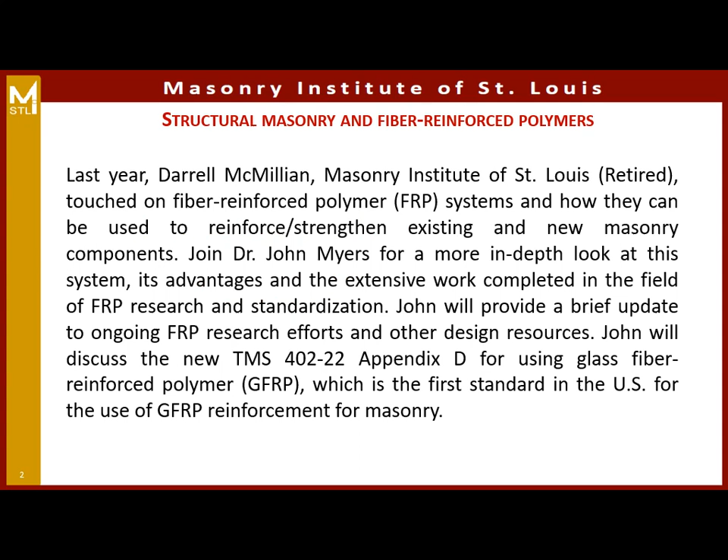Structural masonry and fiber reinforced polymers. Here is the program description and our learning objectives. You will also receive 1 PDH and 1 AIA LU for those architects.

Today's speaker, Dr. John J. Myers, is a professor of structural engineering in the Department of Civil, Architectural, and Environmental Engineering at Missouri University of Science and Technology, and is director of the Missouri Center for Transportation Innovation. He served as Associate Dean for Academic Affairs in the College of Engineering and Computing from 2015 to 2020. Dr. Myers has been a member of the Missouri S&T faculty since spring of 1999.

He holds a bachelor's degree in architectural engineering from Pennsylvania State University. He previously served as a college acting vice provost and dean. Dr. Myers has researched high-performance materials for the past 30 years in relationship to structural engineering applications. Relative to today's presentation, Dr. Myers is current secretary for ACI Committee 440 on fiber reinforced polymers and assists in an advisory role to the TMS Appendix D task group and a consulting member of PCI's FRP Composites Committee.

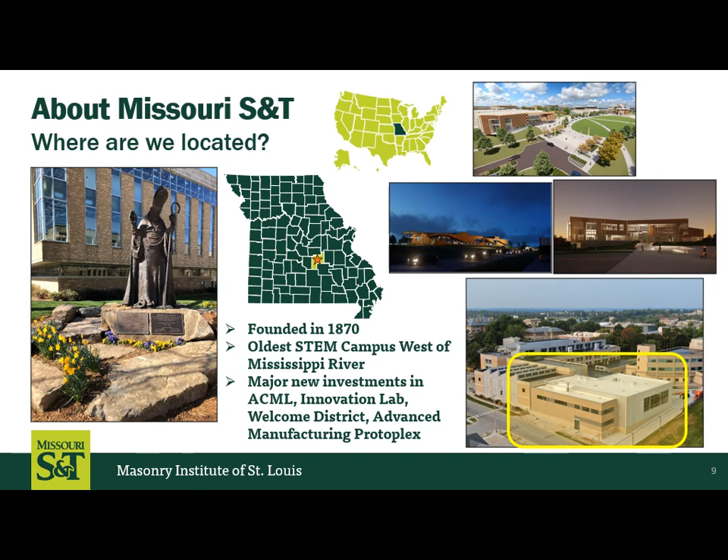And one of our biggest additions, thanks to support from Clayco up here in St. Louis, has been the Advanced Construction Materials Laboratory. It's really the top facility in the country now, and that added on to our structural engineering lab here. We really have outstanding facilities and capabilities. Even though we don't have Division I sports, we've got a great academic program. We actually have 17 different undergraduate degrees in our college of engineering, and essentially, that's the most of any university in the United States. Also, most of our students are in engineering.

So usually it's about 80% of our students in engineering, and specifically that makes us usually a top 20 producer of engineers here in the United States. So if you do have family members, relatives, friends that are thinking about it, come check us out. It's worth the hour-and-a-half drive to take a look at what we've got.

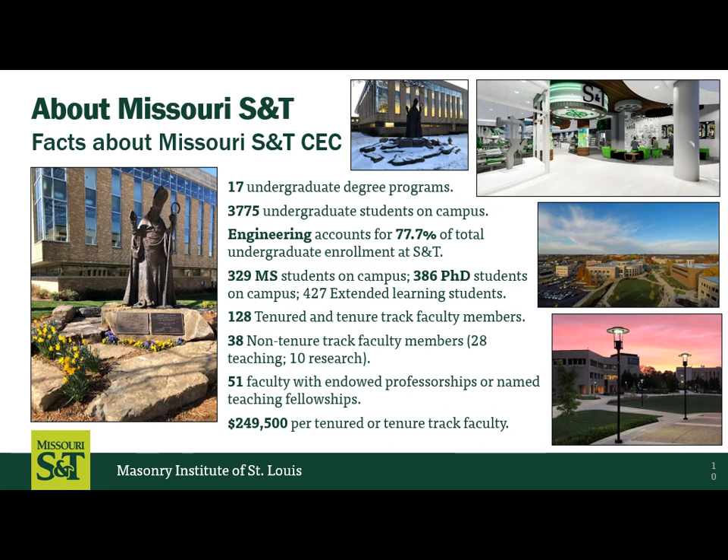One of my roles, I've done a lot of different things over the 25 years I've been at Missouri S&T, but I'm currently the director for our statewide transportation center, and it's actually the University of Missouri System Center. So we work with faculty not only in Rolla, but also at Columbia, at Mizzou, UMKC, and also up here at UMSL. And it's really neat.

One of the big things you've probably heard of is the widening of Interstate 70 all the way from St. Louis to Kansas City, and that's going to give us a lot of opportunity to hopefully have a lot of innovation in the bridge replacements and some of the pavement systems that go along there. A little outside of masonry, granted, but wanted you all to be aware of that.

Today's learning objectives, I'm not going to read them. Margie mentioned some of those, but they're also in your packet for you to study. Basically, we're going to learn more about GFRP and also the new Appendix D, and then I also wanted to pick a couple of research topics. So my presentation is separated into part 1 and part 2 that we'll cover.

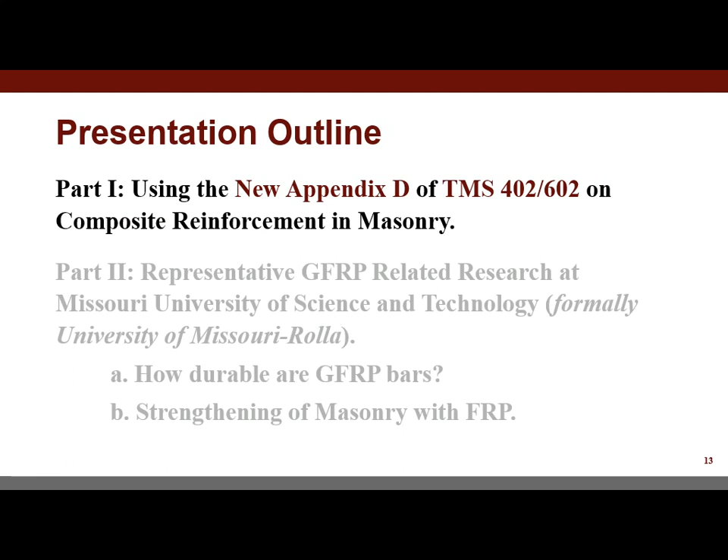Part 1 is going to talk about the new Appendix D and TMS 402-602. And I want to acknowledge Heather at Colby Company. She's very involved in the task group working on this Appendix D, and she did give me some of the content for this part of my presentation. So up front, I really want to thank Heather for giving me some of the material in this section of my presentation.

GFRP bars date back more than 25 years ago. When I started at Rolla in the late 90s, research was already taking off on how we can use these non-metallic materials in structural engineering applications. And in the early 2000s, actually as early as about 2001, at Missouri S&T, Tony Nanni and some of us at the university did some of the first research on masonry using both FRP for repair as well as for grouted cells as reinforced masonry with GFRP.

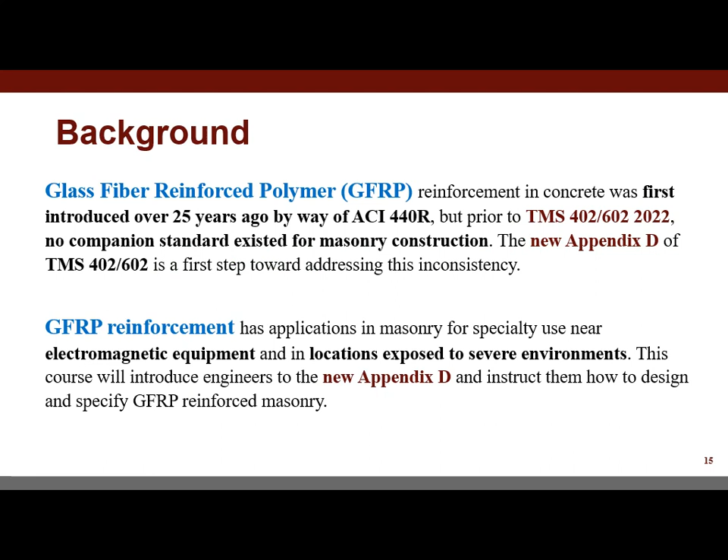So even though it's been like 20 years, now we finally got a section in the TMS standard. Where do you want to use GFRP? A lot of times if you have issues with electromagnetic equipment, MRI equipment in health facilities buildings, it's a good application, as well as in areas where you're worried about corrosion of steel in severe environments. Other applications, GFRP has a very low mass, so when you're doing seismic retrofits or repairs, it's a very high strength material with low weight, low mass—also very good for seismic type repairs.

I'm going to go through, before we jump into the Appendix D, and talk a little bit about ACI, ASTM, AASHTO, and the Masonry Society documents.

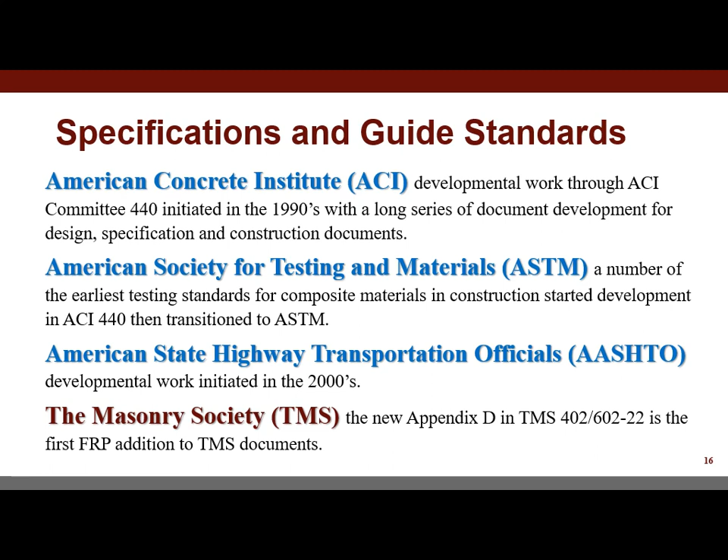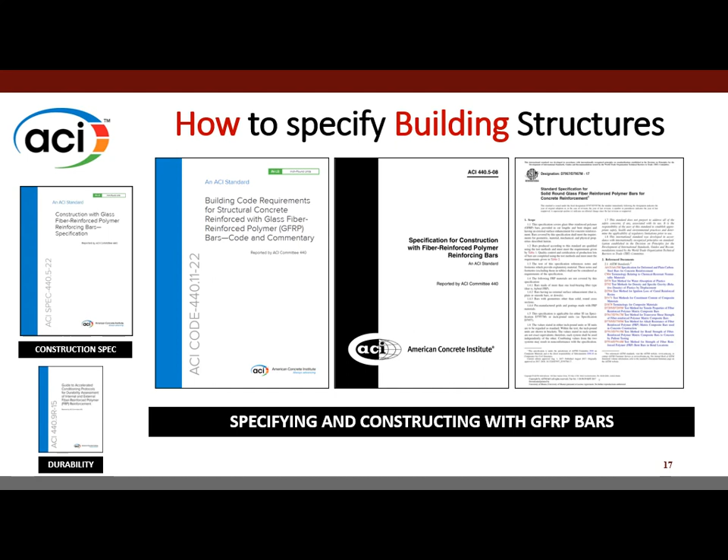And so I always like to say, you know, you need the 3 legs of the stool. If you don't have the 3 legs of the stool, what can happen? It can topple over. But it's the material spec, the design code, and the construction spec. So even though some of these aren't necessarily falling underneath TMS, these documents are out there at ASTM, ACI, and so forth to help us as designers.

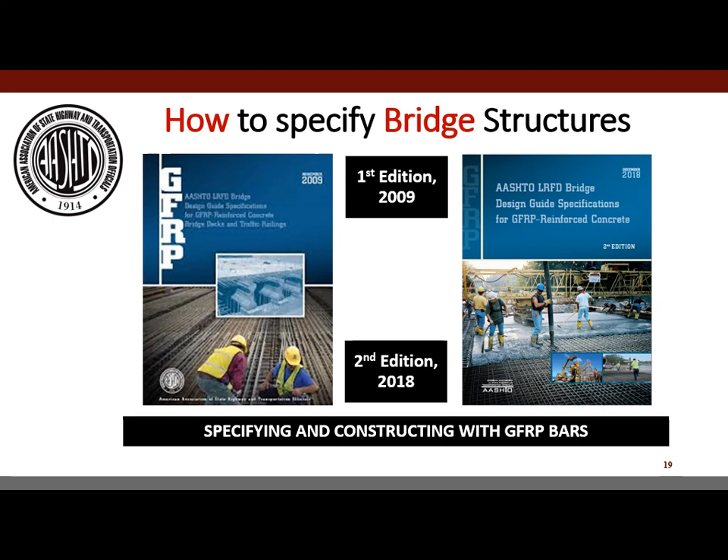Following the development from the late 90s up until today at ACI, on the bridge side, some of the first applications was 2009. Now what you see in the images here are more use in bridge decks. We're going to talk about why some components are better use of FRP than long-spanning elements where deflection or serviceability is an issue. But you can see here 2018, and it's really a good place to use GFRP in decks, for example, because they're not necessarily a collector element of loads.

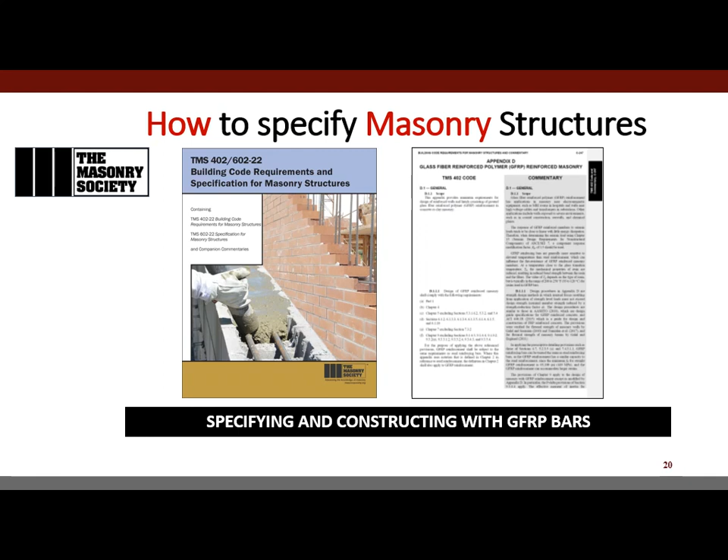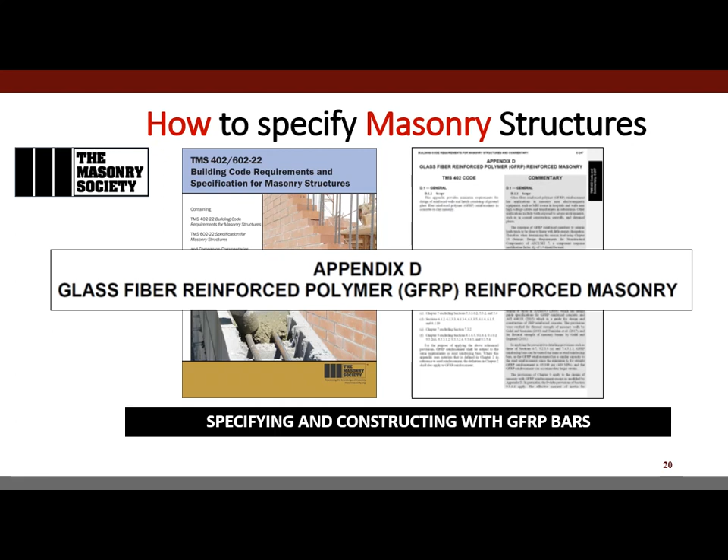So now that brings us to TMS and masonry. Again, we're going to be talking about Appendix D in the new standard that's out there. We'll look at one example in today's presentation, but your packet also has a second example in the back of it for you to take with you that we just don't have time to get into today.

All right, GFRP. I think I brought a sample with me. I'll pass this around a little bit if you've never seen it. Very lightweight material compared to steel.

Basically, if I think of concrete, concrete is made up of what? Coarse aggregate, right? Fine aggregate, Portland cement are the basic building blocks, and potable water, right? In concrete, we get the stiffness from what? The aggregates, right? And the paste, the Portland cement and the sand or the fine aggregate, is the glue that holds the aggregate together. A composite material like this is very much the same. It's got the fibers in it that carry the load, provide the stiffness, in this case glass, and then there's an adhesive, in this case we call it a resin, that is the glue that can transfer the load between the fibers. So if I use the analogy of concrete, these composites are just the same.

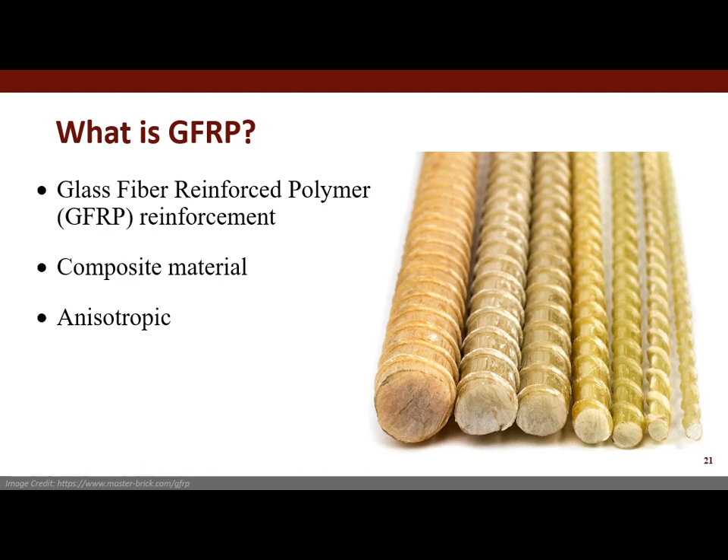One difference here is anisotropic. Okay, sounds like a fancy word. It just means that the properties of the material are not the same in all the directions. So if the fiber is running vertically, that's going to have one stiffness and one tensile strength, for example, in that direction. But if I cut it perpendicular to the direction of the fibers, it's going to have much different properties. So if I take a mild steel bar, right, we call that what kind of material? Homogeneous. So if I cut in this axis, this axis, this axis, mild steel is going to have the same stiffness and the same properties, right? So one thing we need to learn about the use of GFRP is it has different properties in different directions.

Okay, when it's manufactured, this schematic shows how it's manufactured. Again, up here you can sort of see a schematic of the actual fiber and the resin. There's different types of resins. There's polyester resin, that's an older generation. Now there's vinyl ester, which is a better product, a better glue or adhesive that's more durable.

When it comes to producing it, again, you have the spools of the continuous fiber. You get to a stage where you do some surface treatment. In this image here, you can see A through F. There's different types of treatments I can put on this. Some are just a sand coating. You can see some have some helically type of windings on it. But if you were to guess, why do we care about the surface treatments to the bar or the product? That gives us better bond, whether it's concrete or whether it's grout in a masonry cell. So it is important in terms of the surface treatment to the reinforcing material.

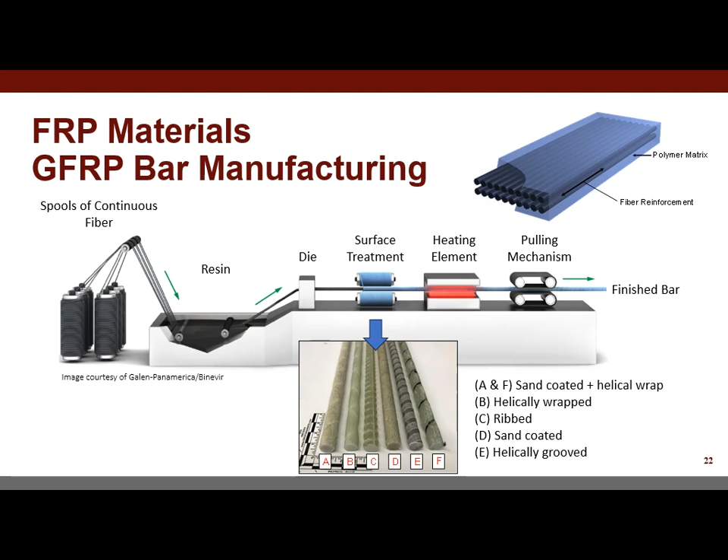We know it's non-corrosive, it's thermally neutral, non-conductive, it's lightweight, like I said earlier. And of course, if I'm at a job site, it's a lot easier to move around because it's a much lighter weight material.

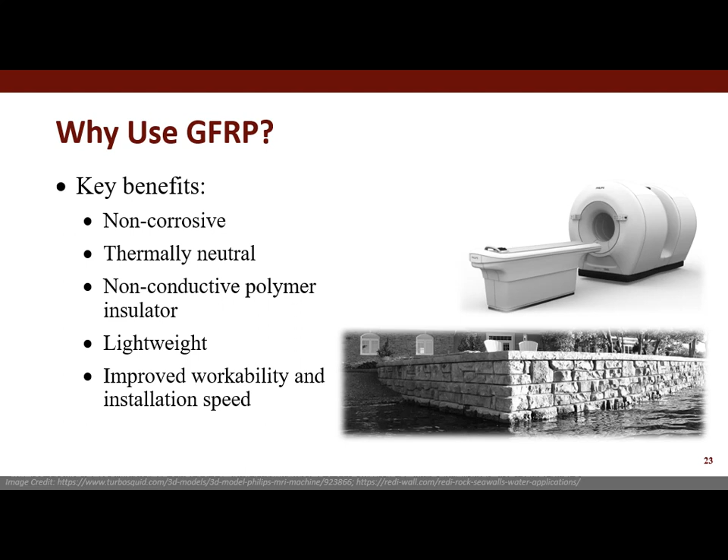So when we talk about Appendix D and its scope, first I'm going to talk about right now what it is included in the document, and then we'll look at what's not included. The path in terms of what's in the TMS document and design standard is very similar to ACI. As we went along over the last 20 years, each time we developed a new version of it, we added newer content to it to help us as design engineers. Right now, this is an Appendix D, but I see down the road that this will be integrated into the main section of the standard. But again, G standing for GFRP. There's different types of FRP.

There's carbon, there's basalt, there's other bars out there. This document right now just looks at the use of glass. I'm going to talk about why glass is a really good material for masonry, because it's very compatible to be used in masonry rather than carbon.

If you hear the word carbon, what pops into your mind? A company a little north of us, Boeing, right? There's a lot of carbon fiber in the aviation industry. It's much more expensive, and it's got much higher tensile capacity, as high as 300 KSI, compared to maybe 100 or 90 KSI in terms of the tensile capacity of GFRP.

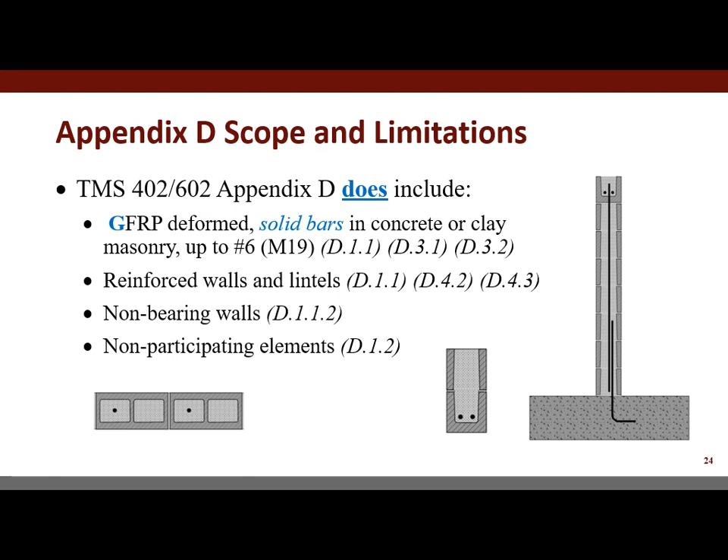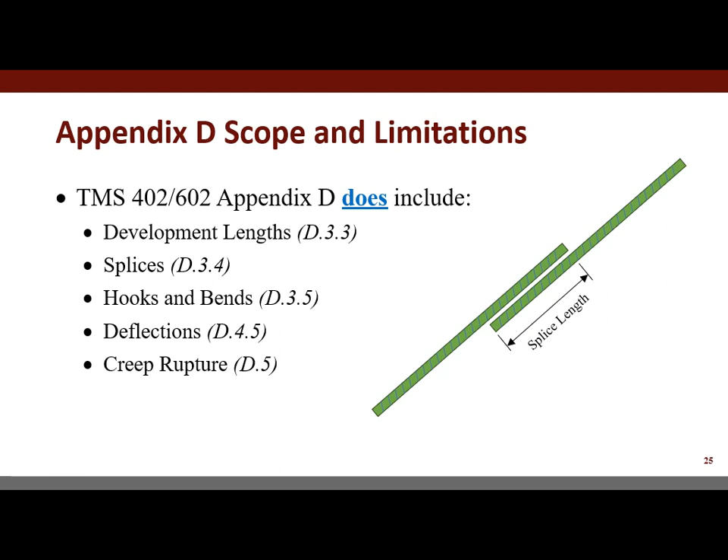It also includes guidelines on how to determine the development length, so how far we need to anchor this in order to develop the tensile capacity of the reinforcing material. I showed an image I put together on splices, hooks and bends, deflections, and creep rupture that we'll talk about. All these are covered in the Appendix D section.

Right now, because this is a linear elastic material, not as much has been developed on seismic requirements. I'll go back to when I was working on my PhD at Texas in the early to late 1990s. We were working on high-strength concrete. Everybody was concerned that high-strength concrete, under compression, is very explosive when it fails - not a very ductile material. All very true, but over time we learned more about how to reinforce it to use higher strength concrete and still give us ductile behavior.

And now we have a thing called UHPC, a very ductile type of material. So even though right now there aren't a lot of seismic guidelines on using these materials because they are linear elastic and don't necessarily have a yield plateau like mild steel reinforcement, people are diligently working on this, and I suspect down the road for seismic applications we will develop good connections in order to do an entire masonry structure out of FRP, even in a seismic area.

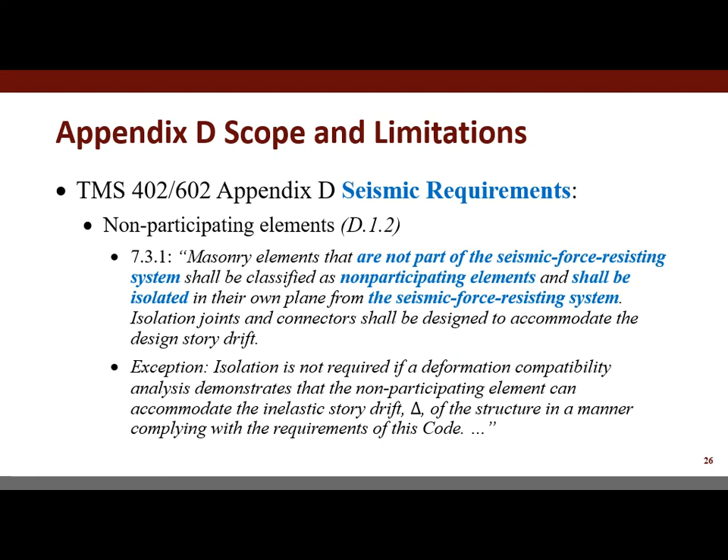But there are some guidelines on that. Now, what does TMS 402 and 602 not include in terms of the appendix? Right now, bearing walls, shear walls, columns, and so forth. Again, it's not that the knowledge isn't out there - it's just incrementally taking the steps in terms of building up the document to address these.

The other thing not covered is externally bonded systems. Cosmetically, maybe this isn't the most attractive thing to do to a masonry wall - we all agree with that, especially our architects in the house here. But there are techniques to strengthen masonry walls, called near surface mounting, where you slot the bed joint and put it in there either with cementitious material or epoxy to get additional strength. A lot of times this might be used on unreinforced masonry walls, or you can use laminates or sheets that we call here.

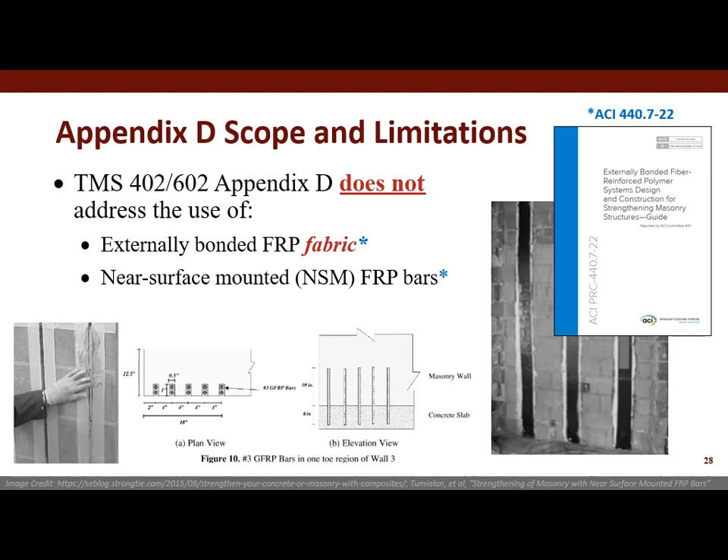Now, this currently is not in TMS documents, but we developed - and I'm on this subcommittee at ACI as well - ACI 440.7, which covers if you want to repair masonry for whatever reason. Maybe it's a new classification, maybe it's an upgrade in loading needs. You can go to this document and it tells us how to do that for repair.

There's a property called the glass transition temperature. So we use this fancy term GFRP, but what is this? It's a plastic, right? We don't like to call it a plastic because some people think plastic is an inferior material, but this is a design material for our needs.

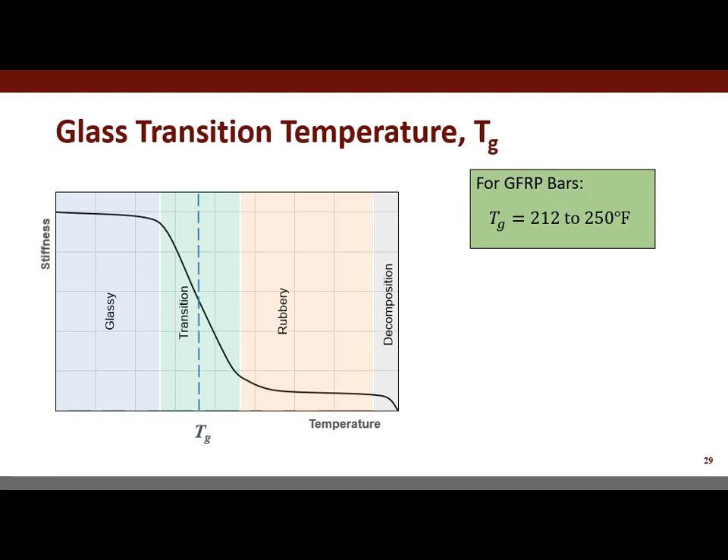But there is a property called the glass transition temperature. So if the temperature gets excessively high, that resin or adhesive or glue can soften, and that gets above this transition region. The glass transition temperature is dependent on the bar, the materials that go into the bar, but usually it's between 212 to 250 degrees. There's a new fiber, basalt fiber, that does a little bit better with higher temperatures.

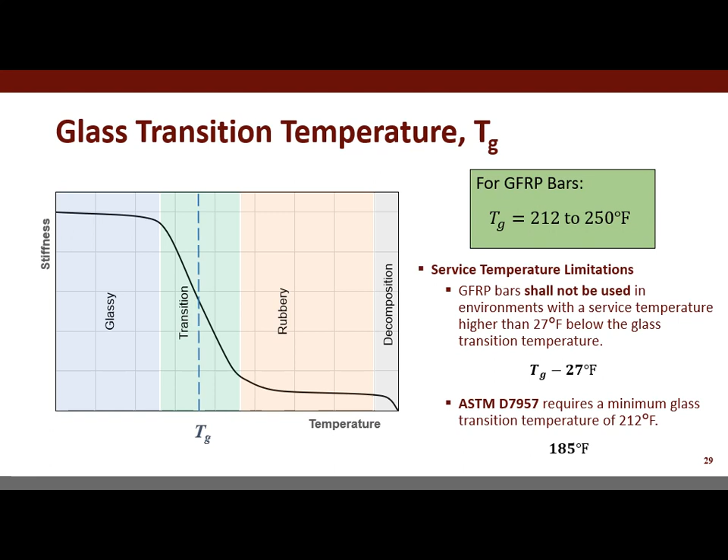If you go to the ASTM, at this minimum glass transition temperature, that's basically a service temperature of 185. Now someone may say, well, what if there's a fire and this is in a building? Well, there are ways to improve the fire rating of components using FRP.

If I look on the right, I see mild steel. From a bond perspective, what do we get out of mild steel? We get friction, which helps with the bond, and the other is mechanical bearing from the actual lugs. One difference in developing the bond or splicing the bar is that the coating system we use is a little bit different, so the development length or splice length of these products is usually a little longer than mild steel, because here you get the frictional restraint as well as the mechanical bearing. You remember your reinforced concrete classes, right?

But there are different types of coatings that are done. In fact, there's a bar manufactured in Australia where they laser etch it, actually lasering the cross section so they get a little more bearing, but they waste material by reducing the cross-sectional area when they laser etch or groove it a little bit.

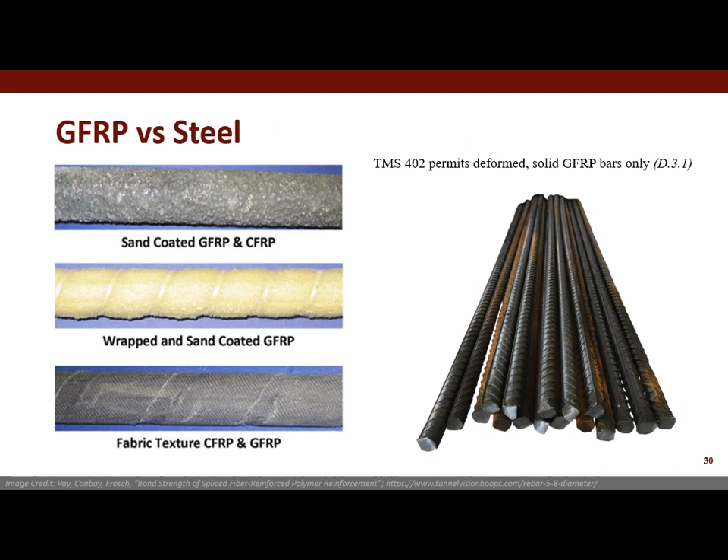When this material is used, whether concrete or masonry, the two failure modes are either crushing of the masonry unit or rupture of the bar. If I was using mild steel, my two failure modes would be crushing of the masonry or steel yielding. And in the middle of those two is the balance condition, where the masonry can crush and the bar can rupture simultaneously. The reason we're interested in the failure mode is because it affects what resistance factors or safety factors we use in design.

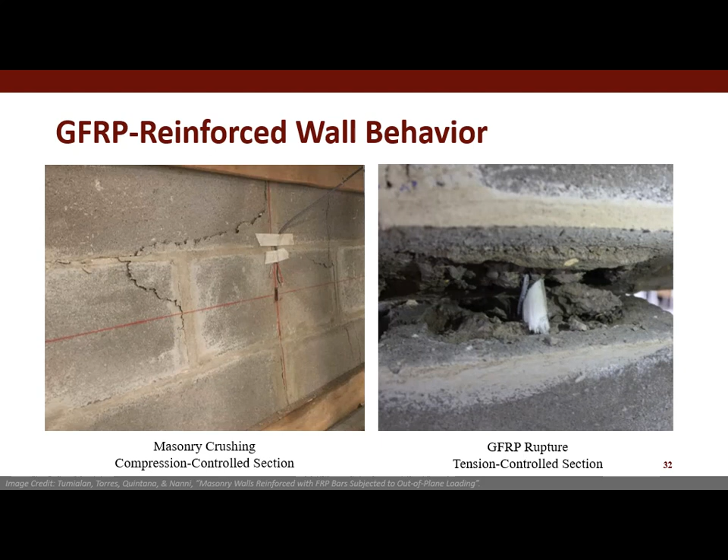In this case, when I look at these two failure modes, which one would you want to avoid? Rupture. So we have to think a little differently when we design with FRP, because we actually prefer masonry crushing as opposed to rupture of the bar. That sounds counterintuitive, but it's actually better because there's less risk of an actual structural failure in the system. However, the factors we use in design really protect us from ultimately a rupture failure.

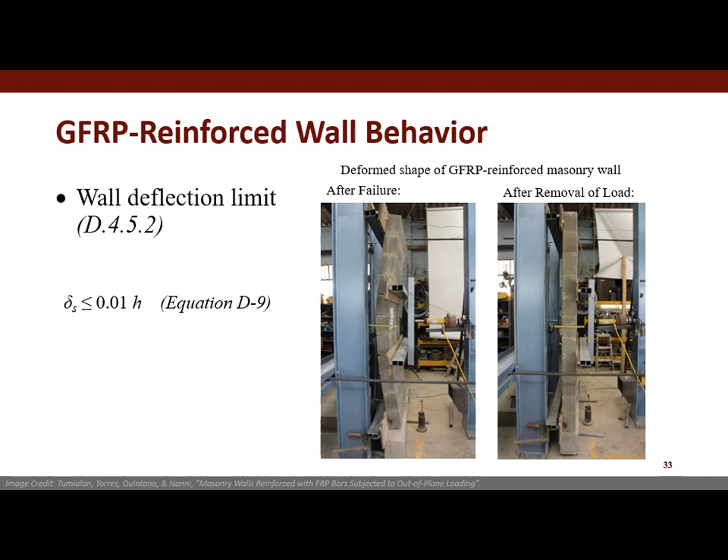Here's two examples. On the left, you can see the wall under load, and you can see these materials can really displace quite a bit. This is above the cracking moment, so you do have some damage in it. But once you let go of the load, because it's a linear elastic material, you'll have some deterioration or cracking in the wall or beam system, whatever you're designing, but it will kind of rebound like a rubber band back into its undeformed shape with some displacement-related damage.

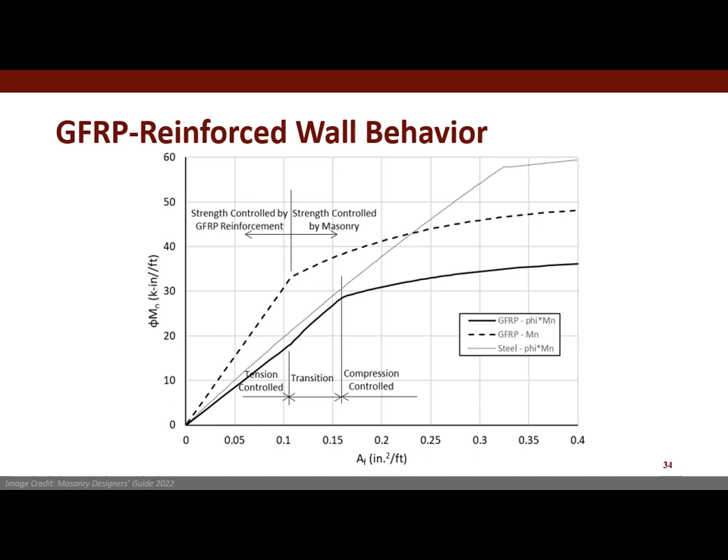Here you can see steel in the very fine dashed line, and you can see GFRP. There's no problem capacity-wise trying to generate higher levels of load. However, since the failure modes are different—rupture of the bar—we have different resistance factors in this document. If I have tension control where the FRP ruptures, the phi factor is 0.55, and you can see what the resistance factor plot looks like here. On the bottom, if it's compression controlled, it's 0.75.

Now, if I want to get more efficient use of my material, as a designer, which type of failure mode would I want in general? In this case, I'd like to use compression control because it's 0.75.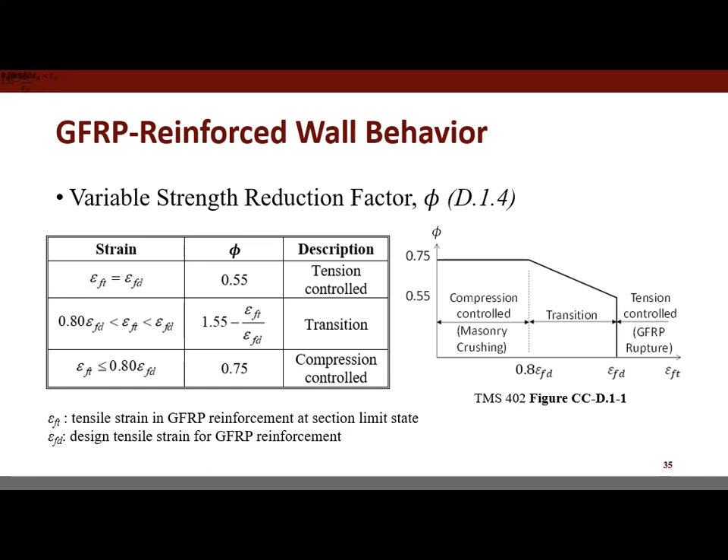If we flip this around and have a masonry system with steel in it, this value is going to be 0.9 for tension controlled and 0.75 for compression controlled. So if I have a plot here, it's going to go across at 0.75, transition, and be 0.9 up here if it's steel. I'm just trying to contrast the difference between using FRP and steel. But from an efficiency standpoint, I'd rather apply 0.75 to my moment calculation rather than 0.55. So we actually are trying to push designers to have compression controlled rather than actual loss of tensile reinforcement, if that makes sense.

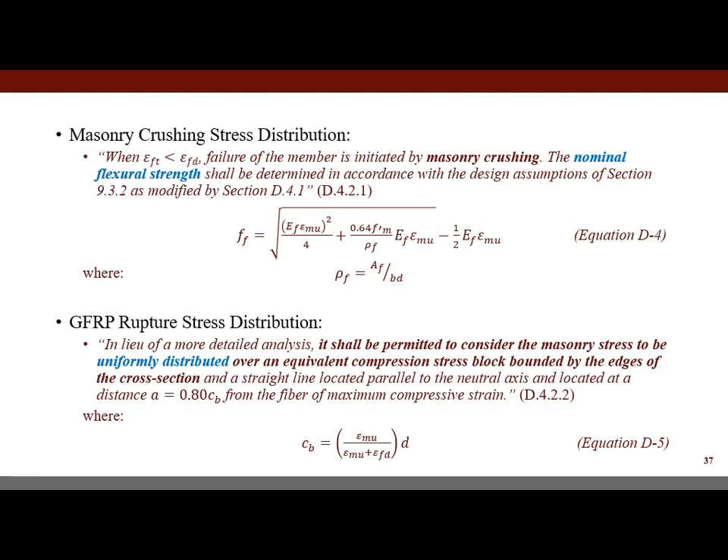There's also an estimate of where the neutral axis is under the balance condition, which is this expression that helps us estimate where the neutral axis is located when we have GFRP rupture, or tension controlled. So there are two different values for the stress in the bar at rupture versus when we have masonry crushing. In this document, you can see the C sub B, the neutral axis, when we have rupture of the FRP. I'll point out that we estimate the stress block on the compression side by 0.8 of that C sub B value for the balance condition, and that's how we estimate it. Realize the shape of the stress block and the strain block is a little different for masonry crushing versus rupture.

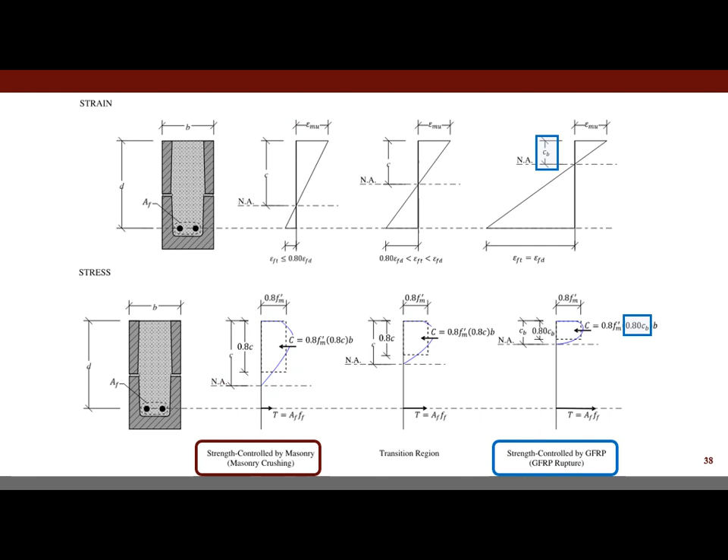When we look at the materials, another thing I want to point out is if you order a grade 60 mild steel bar, what's your guaranteed yield strength? 60 KSI, right? Ultimate's probably going to be 75 to 79, somewhere in there.

These bars all vary, since there's different manufacturers. Why do they vary? Well, that's because when I make this bar, just like batching concrete, one ready-mix plant may put more Portland cement in than the other, so the properties of the concrete are going to be different. The ratio of fiber to resin or adhesive has a requirement of 70% fiber minimum, but different manufacturers have different sizings of the fiber, so all the products are a little bit different. So when we design, we might have to make some assumptions on the properties of the bar.

There's not lots and lots of rebar manufacturers. There's Owens Corning, there's V-Rod, there's several ones. But it's important to know what the manufacturer's properties are that you're going to be using, or your best estimate that you can come back and tweak later as the designer, maybe in a spreadsheet.

The other thing is that the bar size affects it. Smaller bar diameters, because of the sizing of the fibers and the ratio of fiber content to resin, generally always have higher tensile capacity than, for example, a number 8 or number 10 bar. The larger the diameter of the bar, usually the lower the tensile capacity, because of the surface area to volume ratio and some of the logistics of the content.

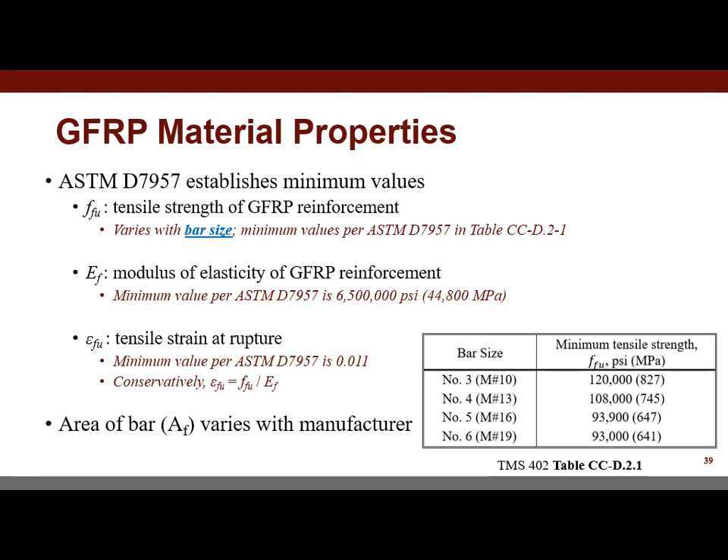But here you can see that there's ASTM, which gives some minimum requirements. So you can always design from the minimums, but of course, if you want more effective use of the material, you want to know exactly what you're working with.

One of the things we apply to GFRP is called the C sub E, or the environmental reduction factor. This is always kind of odd for people, but if I have an outdoor structure and it has steel in it, at some point, what's eventually going to happen to the steel? It gets oxygen, it gets moisture. It's going to corrode eventually, right?

Now, we never put a penalty on steel because it might corrode one day, partly because we know it has strain hardening. We get extra capacity out of it, and we have load factors and other things. Since this is a linear elastic material, we apply an environmental reduction factor, and we use 80% and 70% depending on its location. And there's 3 things that these bars are affected by.

One is temperature, right? We know a little bit about excessive temperature, but temperature can affect it. Moisture can affect mainly the resin, not the fiber so much. And the other thing that can affect it, besides moisture and temperature, is sustained stress.

The other thing is we have a bar bend factor, K sub B. So if I manufacture this bar and want to put a bend in it, the properties around the bend are a little bit different than in the straight portion. So if we have something where the bend properties are critical, we actually have a factor that takes into account the fact that when we manufacture and bend this bar, the fibers may congregate to one side of the bar.

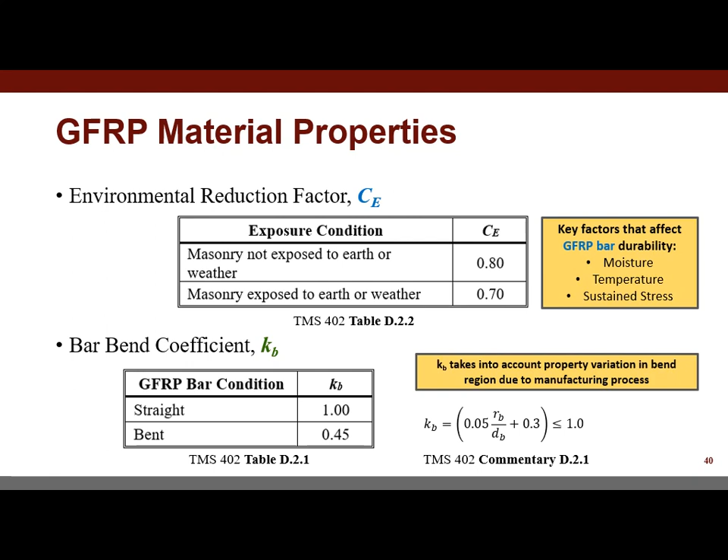Again, for environment, moisture, temperature, sustained stress, I always liken this to steel corroding. All materials eventually deteriorate at some point, whether it's slow or fast. And this takes into account the bend, as we talked about.

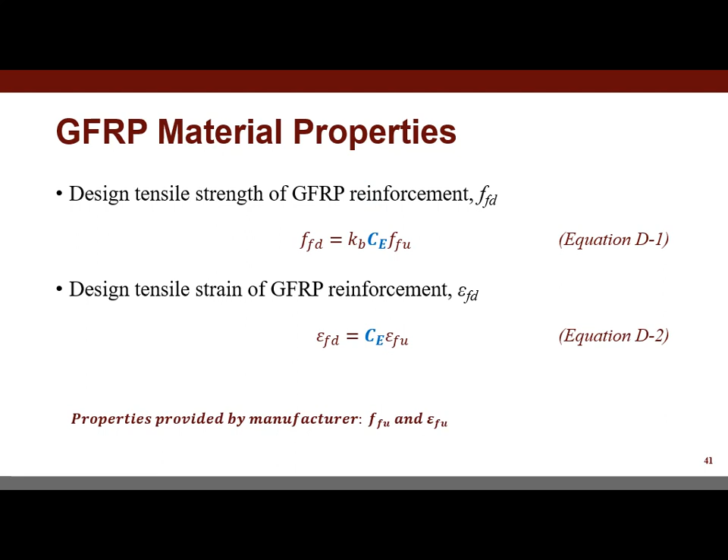So one of the things is we get the manufacturer's properties here, F sub FU. The students always laugh when I say F sub FU in class, but that's the ultimate tensile capacity of the bar. We multiply it times the exposure it's in, and then if there's a bend in the bar, we apply the bend factor, whether it's 1.0 if there's no bend. We apply that to both stress and strain. So it's kind of like a knockdown factor, think of it like another resistance factor essentially. And again, just keep that in mind, that's something we're not used to regularly doing. We have the phi factor we talked about.

We apply that to the nominal. And of course, we make sure it can carry the loads, the ultimate factored loads we're designing for.

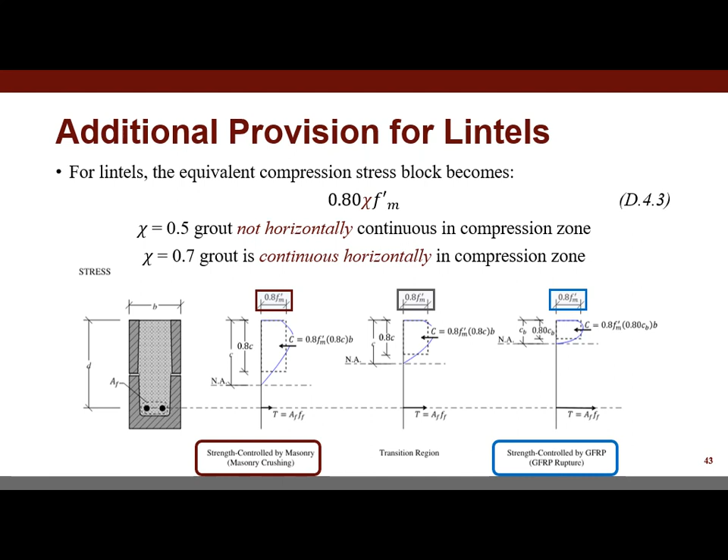Keep in mind that we have 0.8 times F prime M. And there's also a factor that comes in here, whether the grout is not horizontal or whether it's continuous horizontal, because that gives you more capacity in the element, in the section.

For shear, actually in shear right now in the TMS document, we ignore it. So if this were concrete, we would have V of C from the concrete, and we would add V of F from the stirrup or fiber that's made out of FRP. We're taking a conservative approach in this document, saying there's no contribution from the GFRP, even though really there is some contribution in terms of shear resistance. But for now, it's silent and it's ignored.

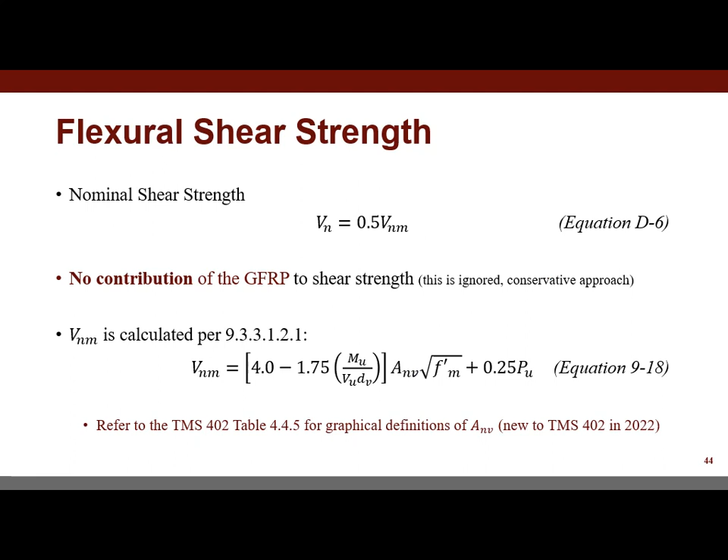But some of these other relationships are very similar to what you might see previously. Creep rupture: if I take this bar and keep a sustained load on it, over time, if that sustained load is too high, it can result in an unintended rupture of the bar. So a lot of our materials are creep sensitive in different applications, and this is one of them. Now remember, when I say sustained loads, I'm talking about effectively the live loads that are involved, wind load if it's a wall, those sorts of things.

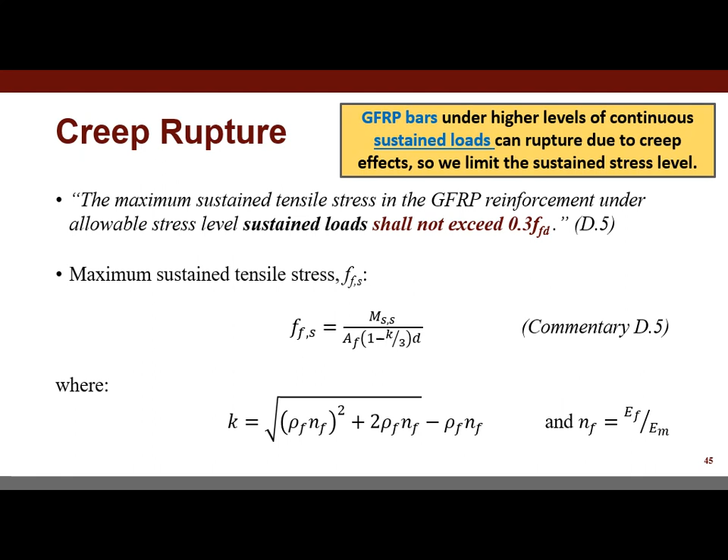But we do need to make sure that it's less than 30%, okay? So that's another consideration, and you see my note up there that higher levels can cause an unanticipated rupture of the material. So let's take a look at an example, and I better pick up the pace a little bit.

Here's an example of an 8-inch CMU wall. It's got the masonry characteristics, the maximum usable strain in masonry, and location of the reinforcement, the amount of the reinforcement. These values for AF, EF, and the tensile capacity all come from the manufacturer, or those ASTM minimums.

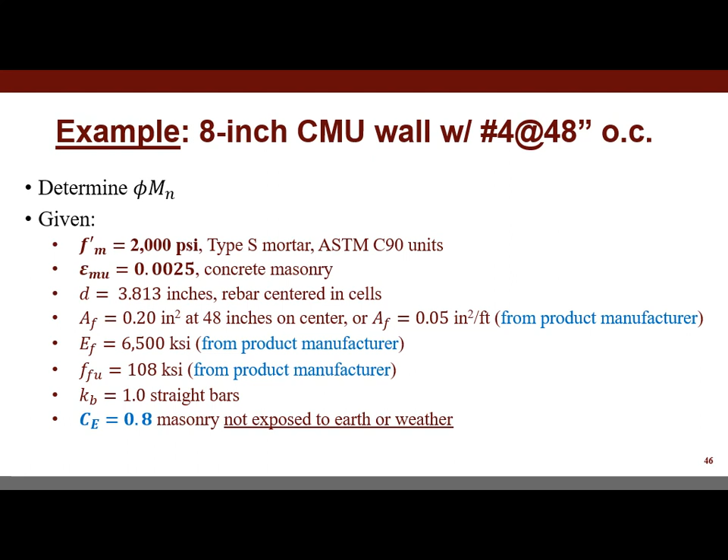And if this is not exposed to earth, we're going to use a 0.8. There's no bend, so it's 1.0. So the first step is we calculate our design value here. Again, we saw that equation earlier, 86.4 KSI.

We can relate stress and strain. It's linear elastic, Hooke's law, you guys remember that. And we can calculate the strain value from Hooke's law. Then I can determine what the reinforcement ratio is.

If this was steel, it would just be AS over BD. Here we have AF representing the area of the fiber. And the importance of calculating the reinforcement ratio that you're using in your design versus the reinforcement ratio of the balance condition is it tells us where that tipping point is between tension controlled and compression controlled of the masonry.

So if I know what the balance condition is, right in the middle between those two failure modes, if I'm less than that, I know the bar is going to rupture. If I'm higher than that, then the masonry is going to crush. And so it's important that we calculate our reinforcement ratio and our balance condition.

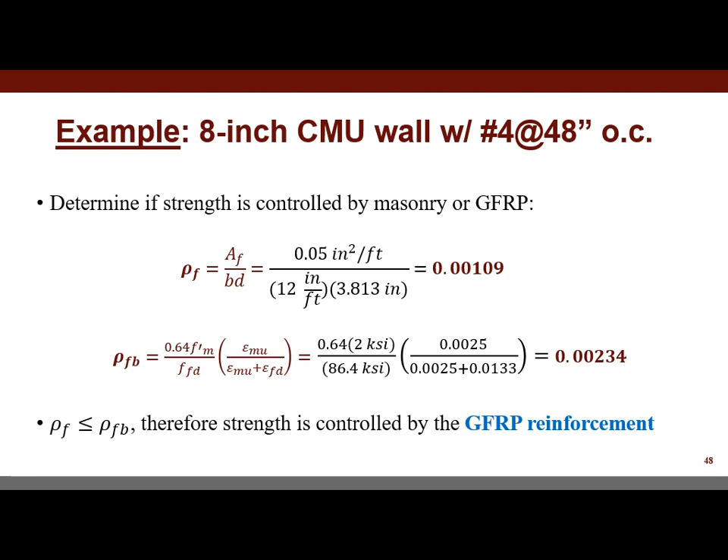And then we can calculate where the neutral axis is. And then once we have that, we have everything we need to calculate our nominal moment capacity of the wall, which we do here. Again, whether it's concrete, whether it's masonry with steel, we're basically pretty familiar with this expression other than the 0.8 C sub B.

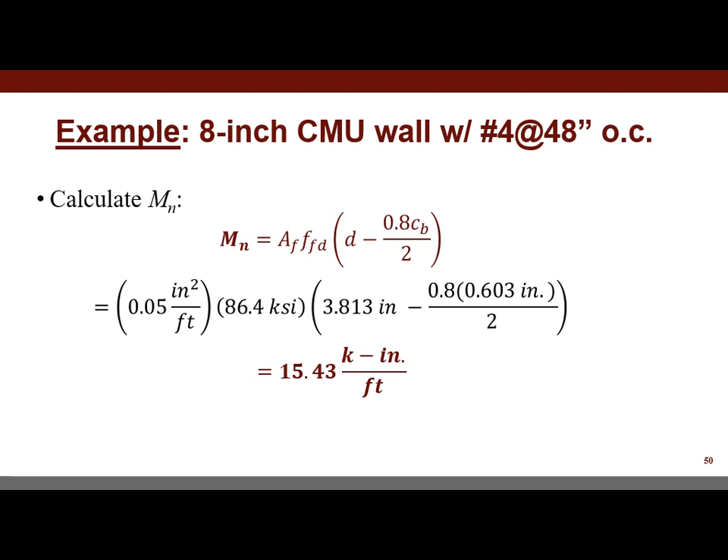And I would ask questions, but I know we don't have time right now. So just remember, 0.55 is the resistance factor because we're tension controlled.

This case is designed for FRP rupture. Although remember what I said earlier, we'd probably actually prefer compression control because this value here would be larger, and our element would carry more load that way, right?

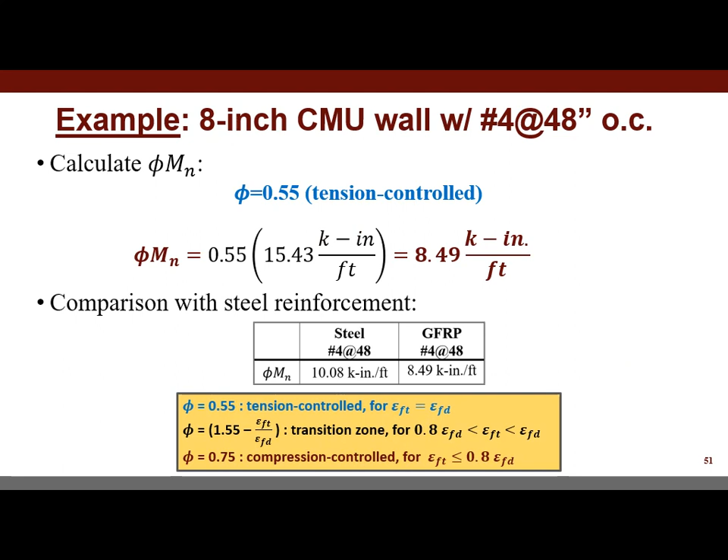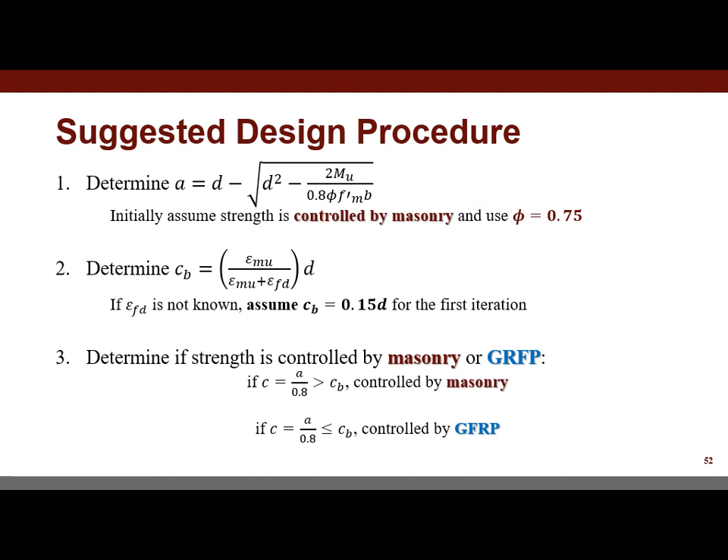This is the suggested steps in the design procedure. I won't go into detail, but this is basically what we just walked through. Step 3, we were looking to see what type of failure mode it is, and whether it was controlled by the masonry or the GFRP, and so forth.

This is going to transition me to the second part, and I'm going to pick up the pace a little bit because I don't want you guys all walking out on me, getting back to work. But I wanted to pick a couple of quick topics on the research side.

So I picked, how durable are GFRP bars? Your question may be, oh, I see the C sub E factor. This worries me, it's going to deteriorate and fall apart. Well, probably not. The Boeing planes with carbon in them, they don't fall out of the sky regularly, right?

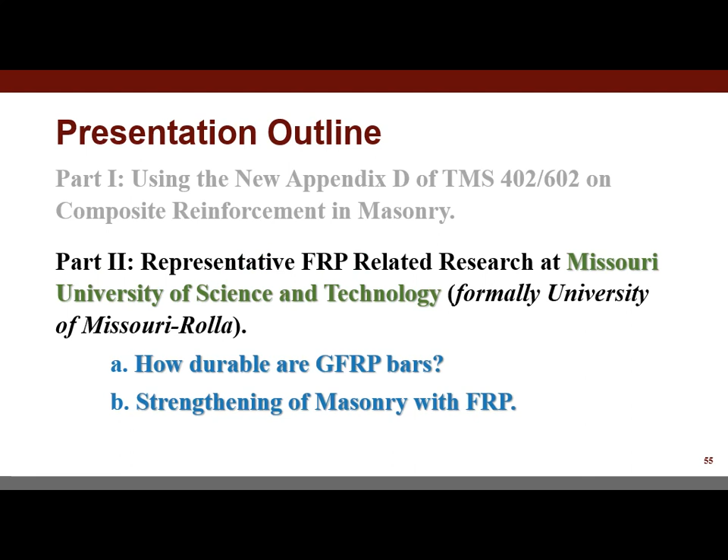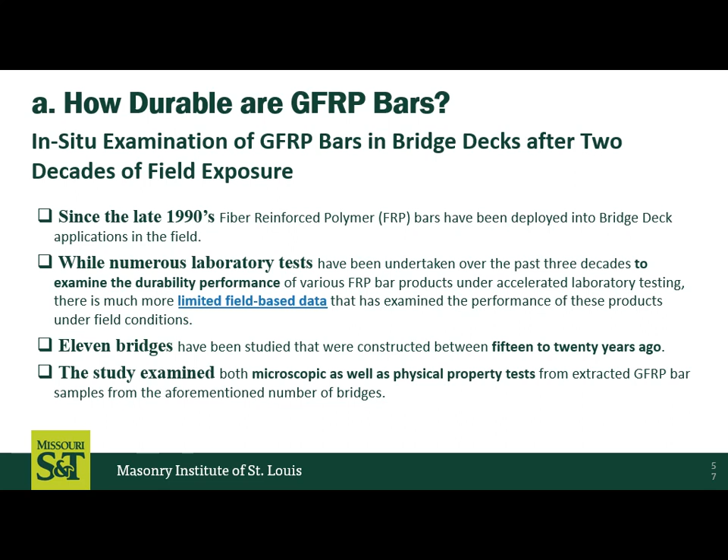Strengthening, and then just a couple of things on strengthening. So in the first topic, one of the questions was, we started putting this into, actually bridges were the first, back in the 1990s, late 1990s, and the 2000s. It's kind of ironic because the first specifications came in buildings, but the first applications were in bridges, and you saw that that didn't come out till later.

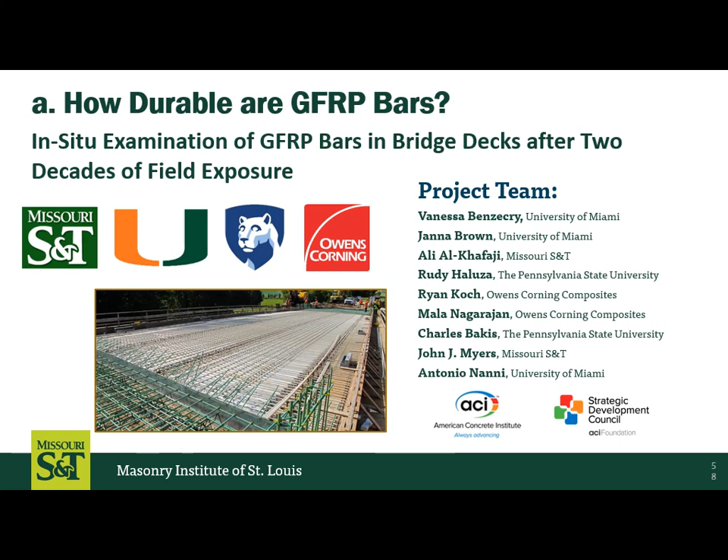So we did a study where we went out and looked at 11 bridges that were constructed mainly using GFRP in the decks. They had been out there from 15 to 20 years, and we were interested, how well is this actually holding up? Because this is maybe an inhibitor to some design engineers using the material.

And we selected bridges in different locations, so different environments, some drier than others, some get more heavy salts, more heavy winter locations. Two of these are actually in Rolla, Missouri, so if you come down for St. Pat's, you can always visit those.

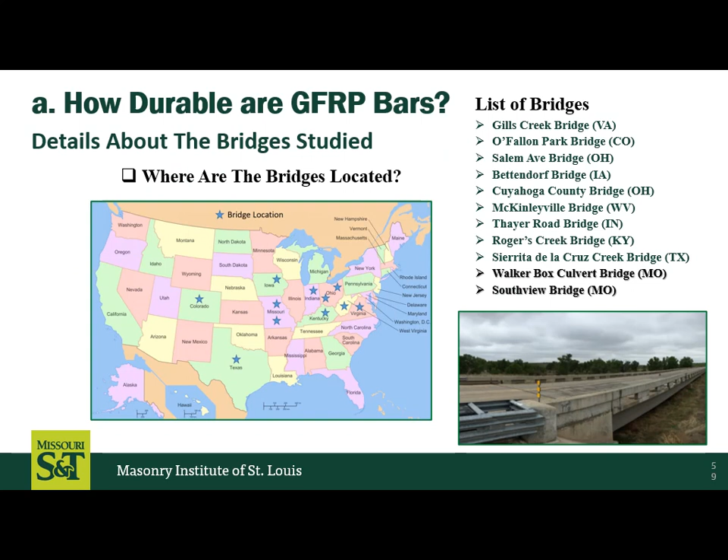We went out and looked at what information is out there on durability. We only found one study, by Professor Brahim Benmokrane up at Sherbrooke in Canada. And so out of the bridges we selected, we tried to fill in more gaps with older structures where we sampled this material.

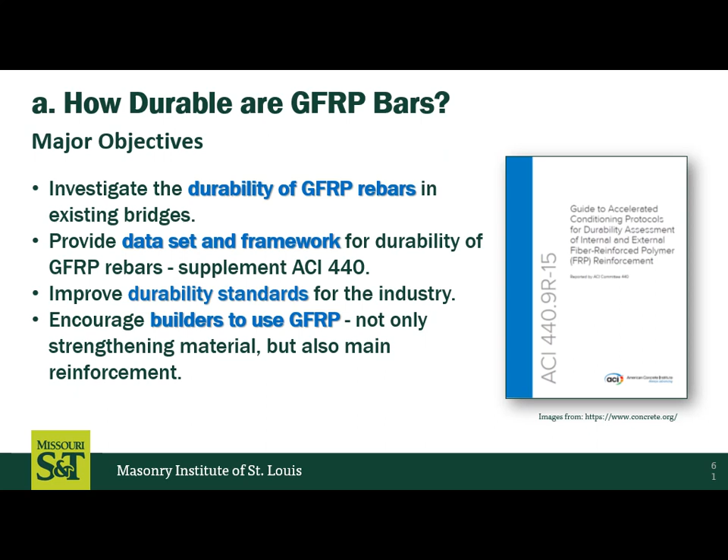I won't go into detail because you got them in your notes, but this is what we were trying to look for - basically how are they holding up, and are these C sub E factors we have in the standards realistic? They were all based on lab type durability studies, but the lab is not the real world, right? So we like real world temperatures, real world exposures.

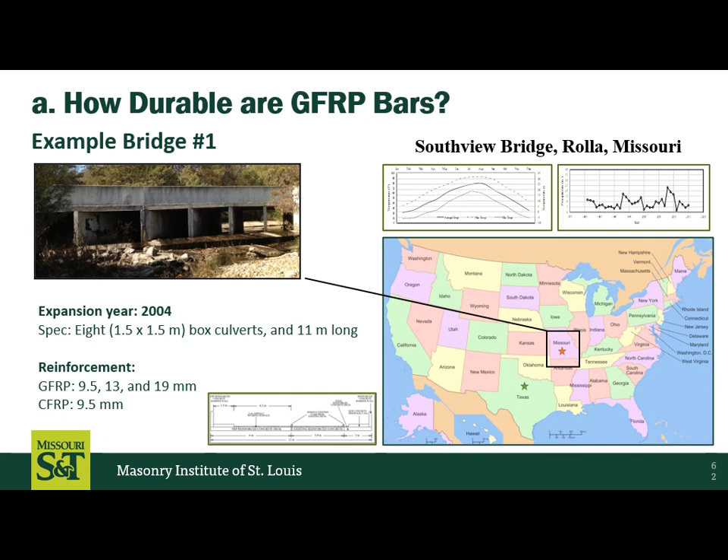And just a cross section, you know, we looked at the temperature, the moisture. This is just a picture of one of the bridges in Rolla. This is one of the bridges in West Texas, Amarillo.

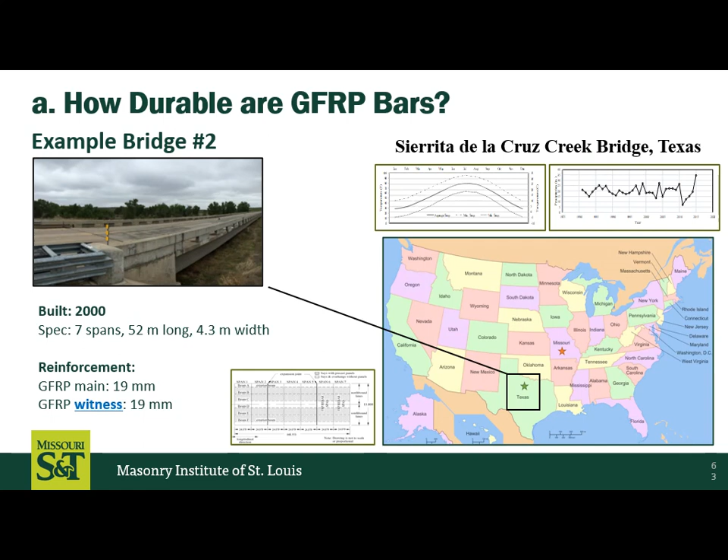And I'm showing this one because this was one of the first bridges where we put FRP in the bridge deck. TxDOT was a little worried about, oh, I don't know if we want FRP in the entire cross section, so they put steel in the bottom mat and FRP in the top mat, you know, belt and suspenders, right?

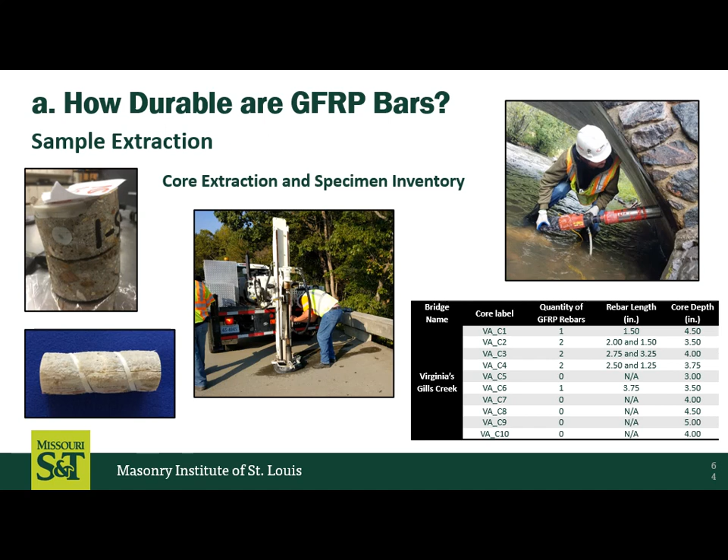But here you can see we were taking samples, extracting cores, and the idea was to get samples of these bars that we could look at under the microscope or pull out that we could physically test in some different tests.

This is one of the bridges in Virginia. You see all the markings in red. Well, since this is a non-metallic material, we couldn't take a rebar device to find exactly where the rebar was located.

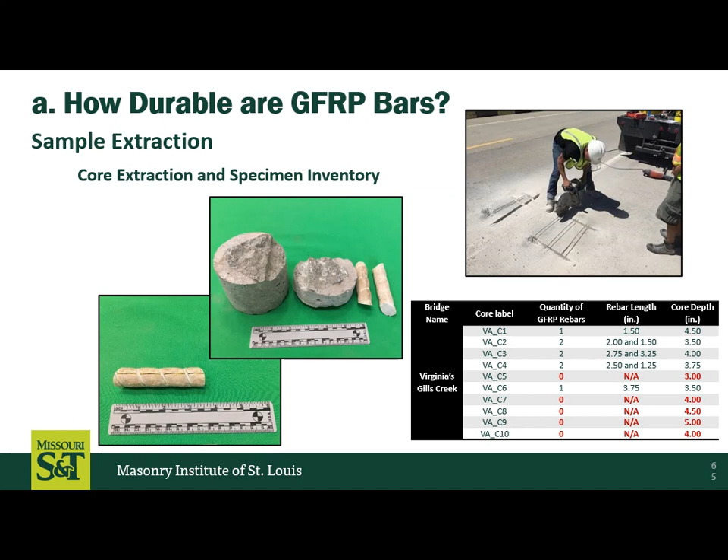We're working on devices to find FRP bars in masonry or concrete or whatever, but some of our cores had nothing in them. Some of the other cores had more than one sample in it. But we developed a series of tests, and I'll show you just some quick pictures on these, but basically we were looking at the FRP as well as the concrete behavior over this 15 to 20 years.

And we set this up as a round robin study. So we had University of Miami, my good friend Tony Nanni, who was at S&T or UMR, us, Penn State, and Owens Corning.

And we wanted to make sure that the results we were getting made sense. So we did round robin testing at least at two labs. This shows you the test, and some of the cool equipment we've got down in Rolla to do some of these tests.

This shows you some of the tests that we did on the concrete. The takeaway from the concrete: the pH levels were where they'd be expected for the age of the structures. There wasn't a heck of a lot of carbonation, and the chlorides were pretty insignificant. So from the concrete side, it was doing great.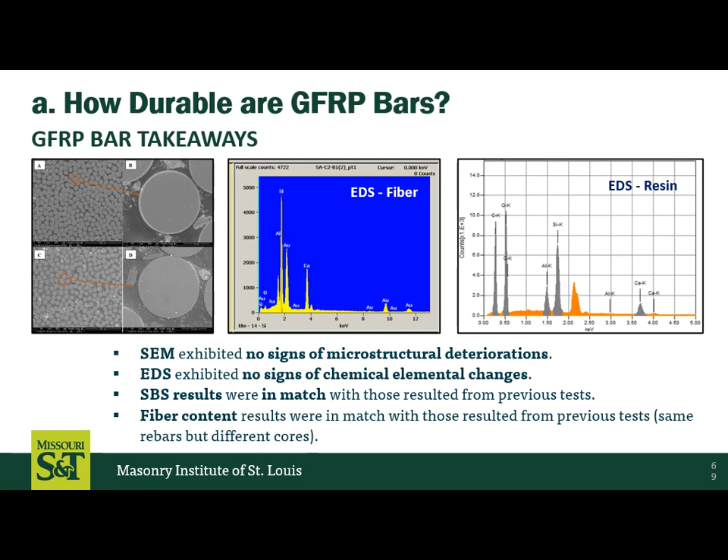The other thing - when we did the Texas project, we put witness bars in the deck, and the witness bars could be cut out and removed so that we could do tensile testing on the bars. And if you look at this, we saw after 17 years a 2.1% reduction in the tensile capacity. Now, we didn't have lots and lots of tests, and we don't have data at this point over lots and lots of years, but the framework of what we did in this study was supposed to set it up for us to collect more and more data.

But if we do take that 2.1% and assume, hey, maybe this is somewhat of a linear relationship, that would mean after 100 years it would only deteriorate by 12.5%. If I project out to the 0.7 - remember the 0.7 C sub E factor - that would estimate a 239-year service life for this material. Now, there's a lot of assumptions, and you know what they say about making assumptions, but it's a piece of information that we'll learn more and more about.

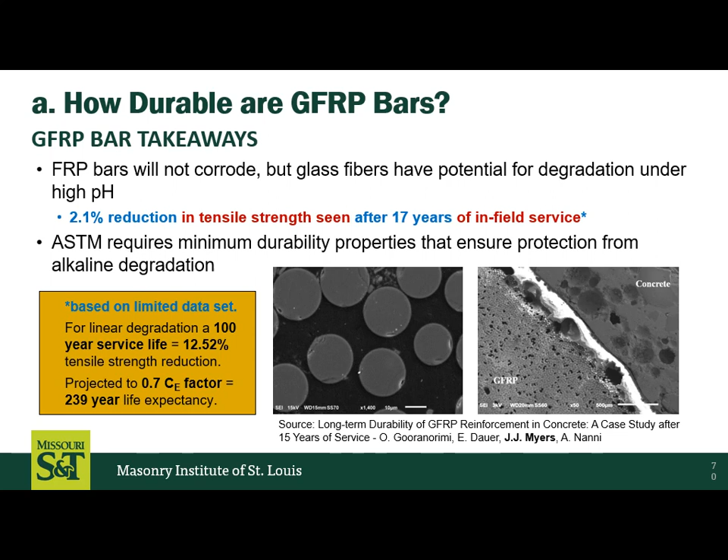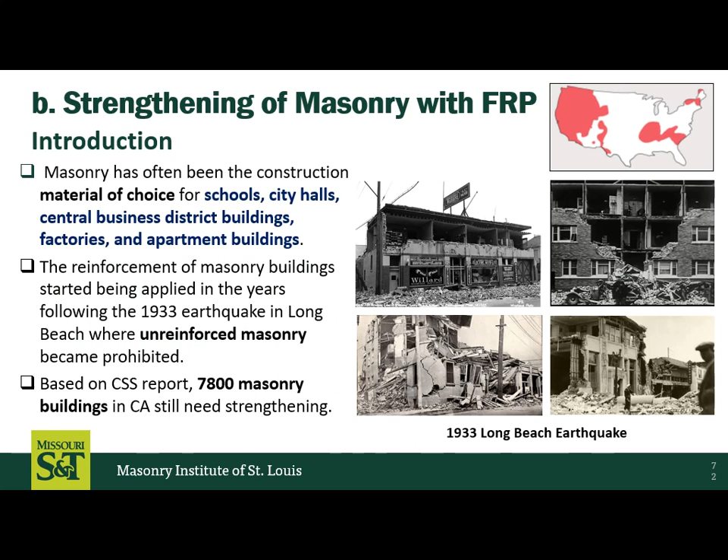Now I'm going to wrap up quickly on reinforced masonry with steel that you may or may not want to repair with composites. So we had that standard I showed you earlier at ACI for unreinforced masonry, and we've done some testing on what if we want to reinforce masonry externally to add additional capacity for whatever reason - maybe it's for seismic upgrade, as you see here, for example.

There's other reasons why we might need to apply strengthening. Design errors occasionally happen - we had a precaster who forgot to put all the shear reinforcement in the stem of the double T, so we could apply external reinforcement to replace the shear reinforcement that they forgot to put in. There's lots of reasons: overloading, change in use, as I mentioned earlier.

But there are basically two different types of repair techniques on the exterior walls. One is near surface mounted. What's unique about this study is it had reinforcing materials, steel reinforcing, fully grouted. And thanks to our friends up here in St. Louis that helped us with some of these specimens.

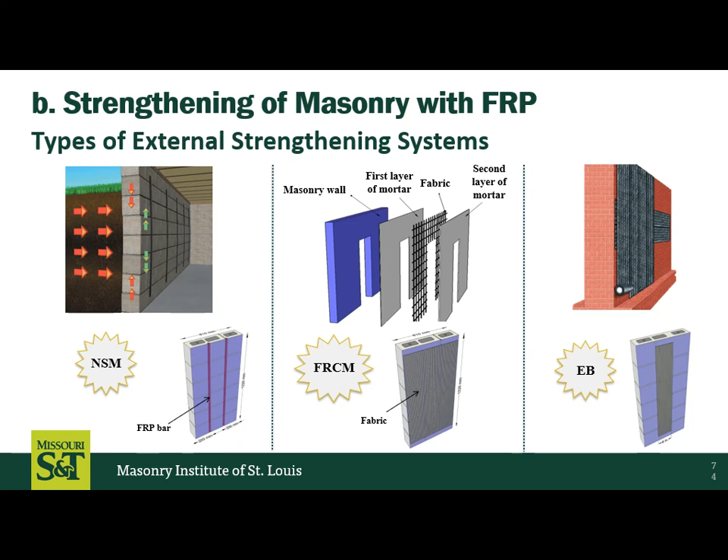There's a new technique called FRCM, which is a fiber reinforced cementitious matrix. Most of the early composite materials, if I'm going to do NSM or externally bonded systems, I use an epoxy - basically a super glue - to glue it to the surface. Since then, the Italians were the first to develop this, but they said, why don't we use something that's cementitious? CMU is made with a cementitious material, so let's keep the materials more compatible and the same. So we did look at FRCM - these two are fabrics. The one on the right uses an epoxy, the one in the middle uses a cementitious material.

And this just shows you some of the steps - grooving for the formation of the groove when you're using near surface mounting. You can tape it to kind of keep it looking cleaner, so if it's a repair, you don't necessarily harm the aesthetics as much.

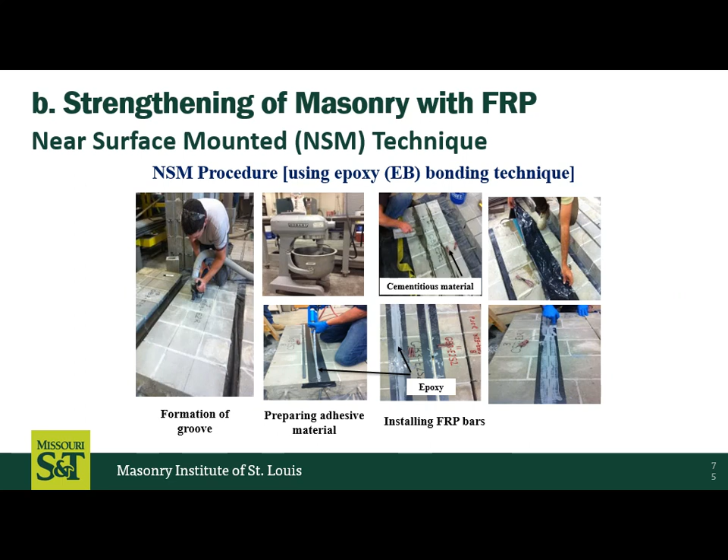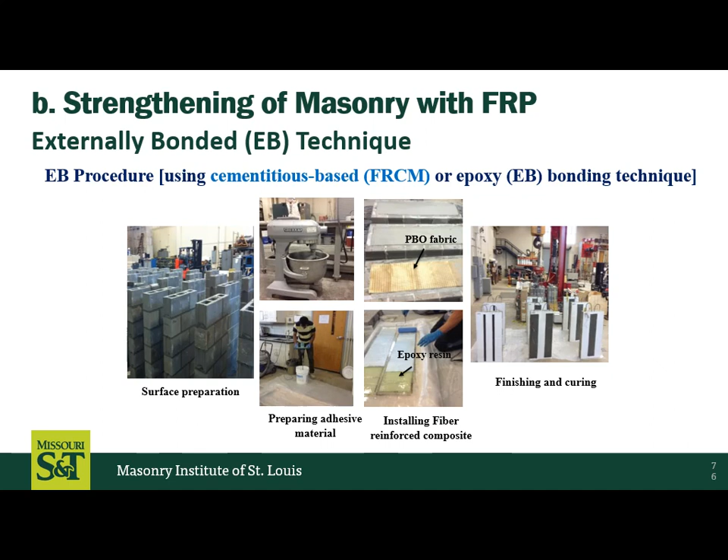That's one of the appealing things of near surface mounting. But we looked at both cementitious as the adhesive as well as epoxy, as you can see on the top and bottom respectively. And then in the externally bonded, we used the cementitious PBO fabric, and then we also used the epoxy to see if there's a difference in these systems. We have done tests where we used an airbag, for example, but these were all tested horizontally because they were reinforced masonry, fully grouted cells on the interior, and then we wanted to see how these repair materials perform.

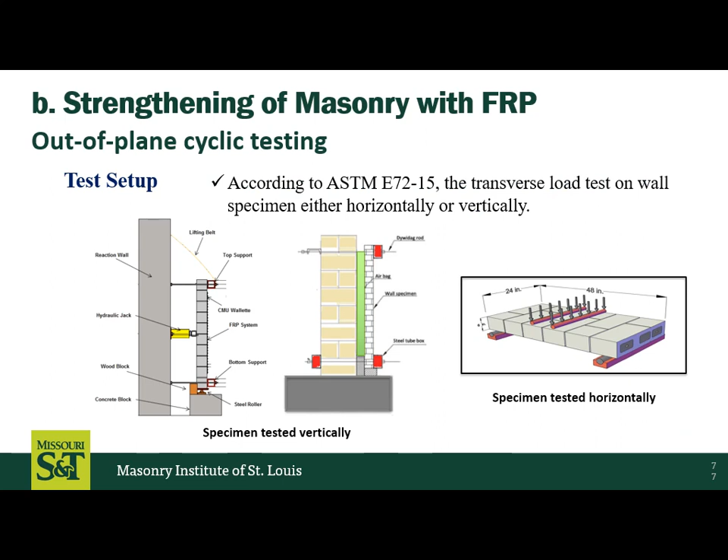I'm just going to give you some takeaways. There's references to reports you can look up and papers if you really want to dive into it. But first of all, near surface mounted with epoxy in these bed joints, what's the takeaway?

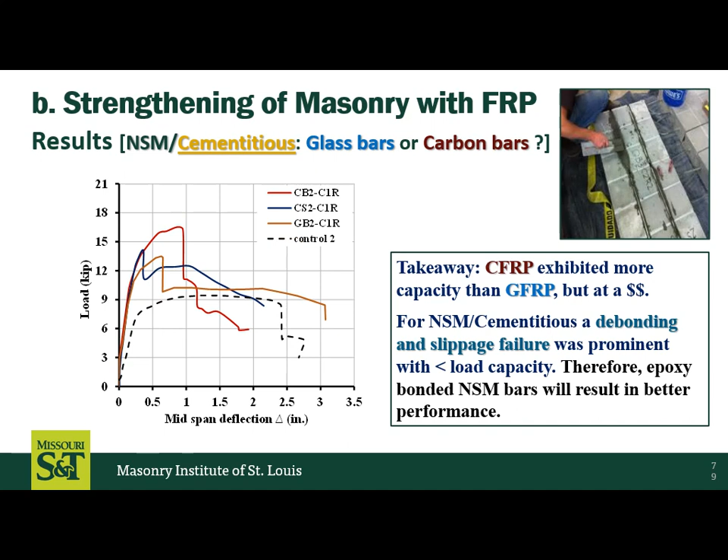If I look at near surface mounted now where I put cementitious in the bed joints, we get less capacity. And this is because of the way it fails—it starts to slip in the groove. So our takeaway is, probably cementitious material in a near surface mounted application is not as good as using an epoxy. I won't read those other details.

The analogy I would use is if we look at concrete, and I'm batching up concrete—here in Missouri, we use a lot of dolomitic limestone as our aggregate source. I could pick a really, really hard, dense aggregate like a trap rock. And if I want to develop a high-strength concrete, maybe 15 KSI or something, that hard, dense aggregate that's stronger than dolomitic limestone, you would think I can develop higher strength concrete. You can't. The materials aren't as compatible. It creates more stress concentrations, and hence the lower strength aggregate is actually better than the higher strength.

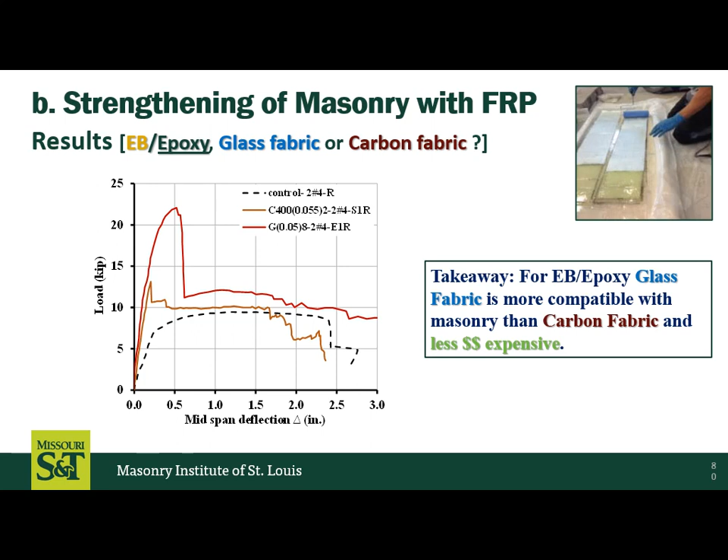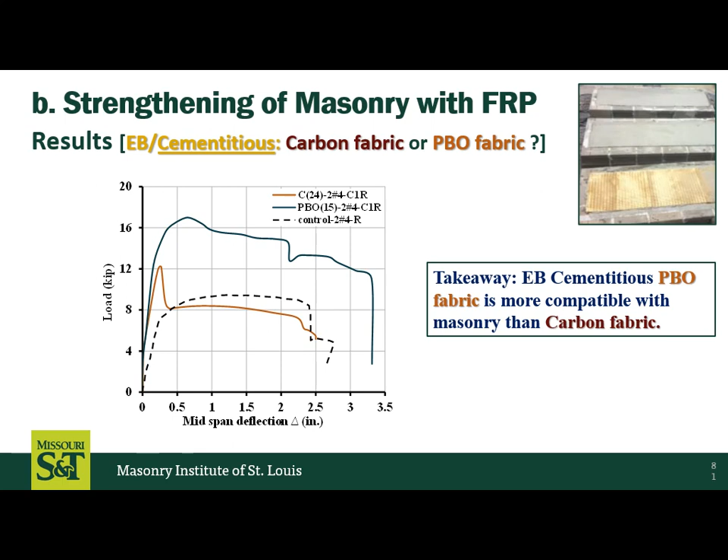It's a similar takeaway here, where the glass is better than the carbon, as you can see. And then for the externally bonded, using this PBO fabric, again that is more effective with the PBO rather than a carbon sheet. Same concept there—the carbon sheet is stiffer, higher strength, and so you start to have debonding failure because of the discontinuity and the stiffnesses of the material.